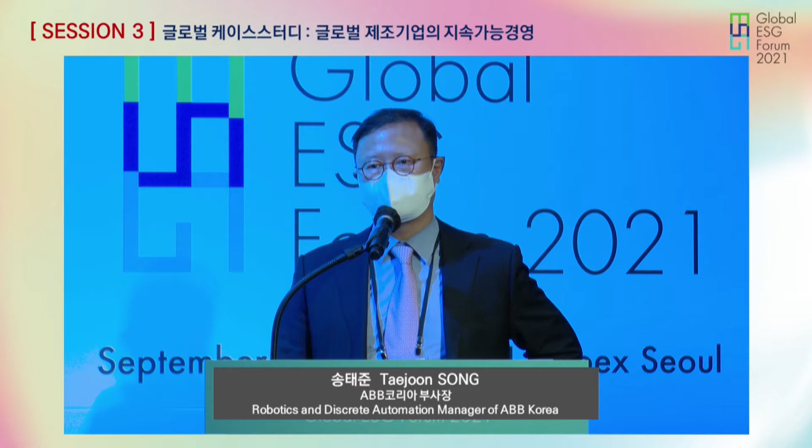ESG is the topic, I think, a philosophical domain, and I'm very happy to deal with this. Through the keynote speech, we have been hearing about the strategy and mission of ABB's strategy about ESG. I would like to go a little bit into the detail and our plan for the present and the future.

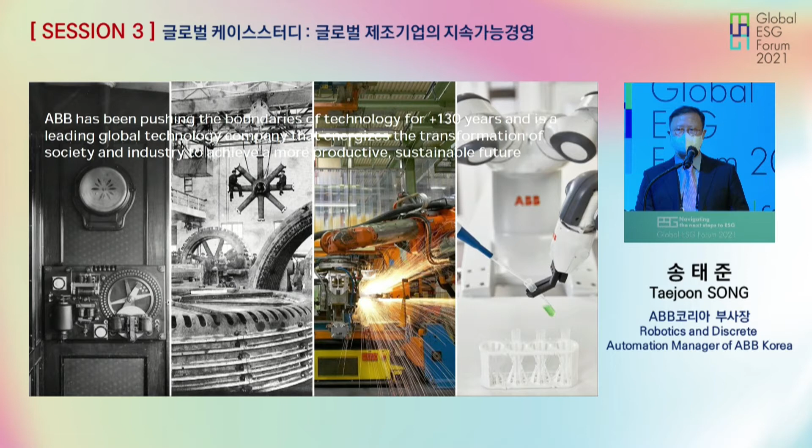You may not know much about ABB, so as an introduction: ABB is a technology provider to lead the changes in society and industry. It has 130 years of history, and ABB is helping more than 1,000 companies around the world.

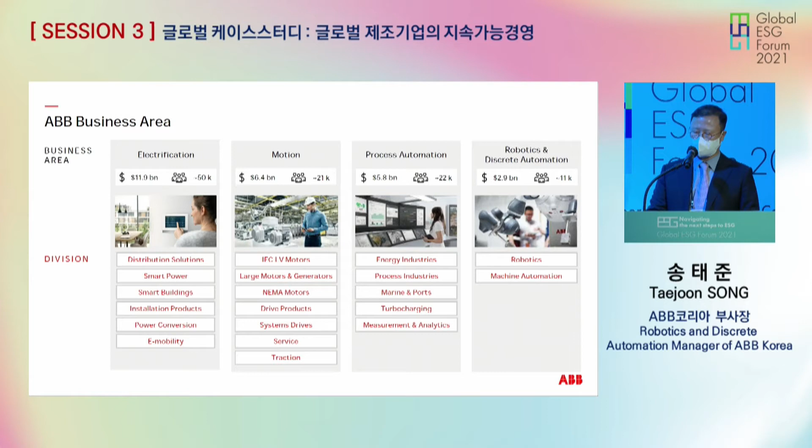As you see here, this is our business portfolio. For the direction of sustainability and ESG, I think these two businesses are important: electrification and motion. They have a very diverse portfolio, and they are the leading global trend in their domains.

As of 2020, ABB has already reduced emissions by 40%. And with the emergence of ESG and CSR, the socially responsible company initiative, I believe ESG is a more detailed or specific concept derived from CSR.

Reflecting the current trend, we have been dealing with different stakeholders, including customers, shareholders, investors, and suppliers. By interviewing them, we capture those results into our strategy. And as an extension, we set the goal for a low carbon society and try to reduce resource use.

ABB aims to make a contribution to society. That's why we came up with this concept, and for that we pursue integrity and sustainability.

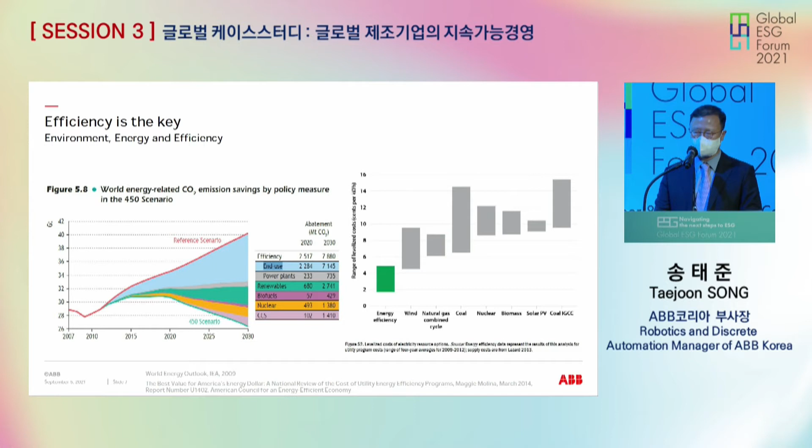ESG strategy is pursued not only internally, but also externally with our suppliers and customers. If you look at energy efficiency directly, the most efficient solution comes from high efficiency motors and drives.

As you know, 3/4 of the world's energy comes from the manufacturing sector, infrastructure sector, and transportation sector. So these three industries cover 3/4 of emissions, and electricity is used to operate motors.

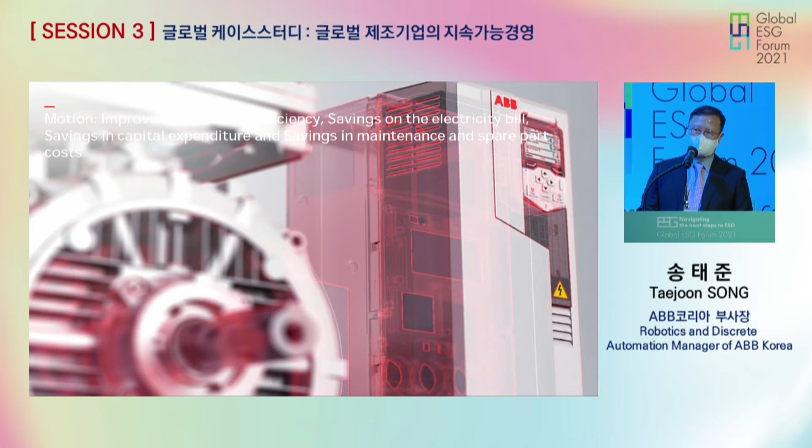70% of electricity is used for motors, and more than half of motors can be better operated by controlling the electricity input. So motor efficiency is important. However, electricity efficiency is not well applied, so half of that 70% and half of the 50% can be improved by making motors and drives more efficient. Technologies are available to make them more efficient, but there are other factors like economic factors, prices, and other reasons that affect decisions.

Today, I also want to deal with the indirect efficiency matters along with the direct efficiency. We have to always consider the impact of the indirect efficiency.

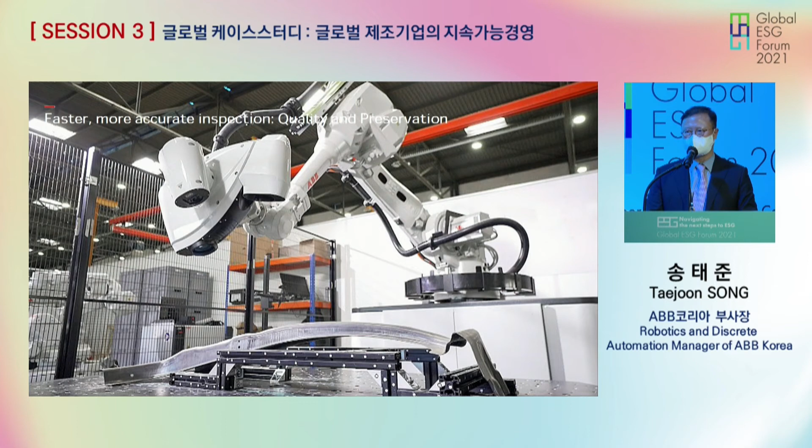The image you are looking at is a robot combined with machine learning and 3D technology. This robot is able to inspect the product's quality very accurately and exactly. When you think of automation, you think of better efficiency and human replacement. However, what's more important is consistency and safety on the manufacturing floor. Consistent quality is important because it is related to resource saving—good quality leads to saving of resources, and that should be included in your decision making.

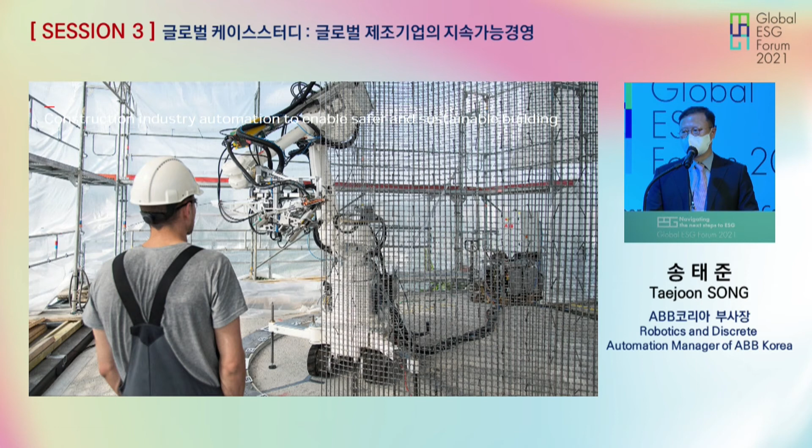In construction scenes, robots are being used for sustainable building construction and on wide construction floors. The buildings are used for a safer environment, and resource saving is also another agenda for robot use.

One important mission is recycling. We can develop eco-friendly materials to replace conventional materials. However, even though recyclable materials are available, the recycle rate is very low. If automation comes in, we can improve sorting activities, and once materials are sorted well, they can be used by 3D printers aided by robotics to produce more value-added products. That will have a better environmental impact, but also a better social impact.

It will reduce energy use and have a better footprint on nature.

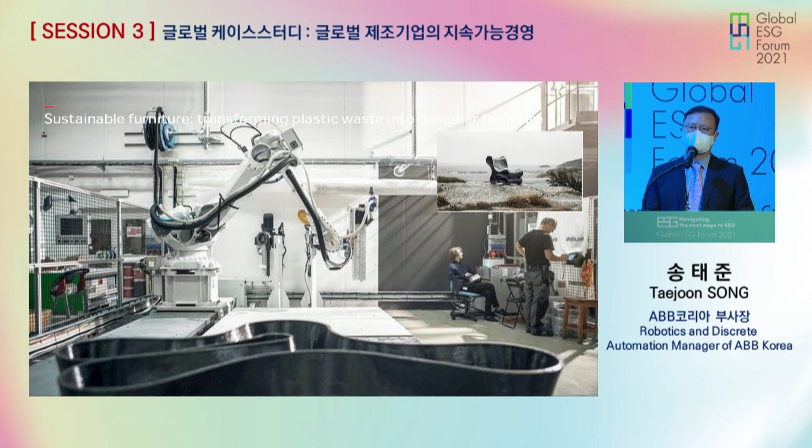ABB technologies are used by customers along with our products and solutions, and we believe that will be very effective. Not only relying on our technology, our customers are making their own efforts as well.

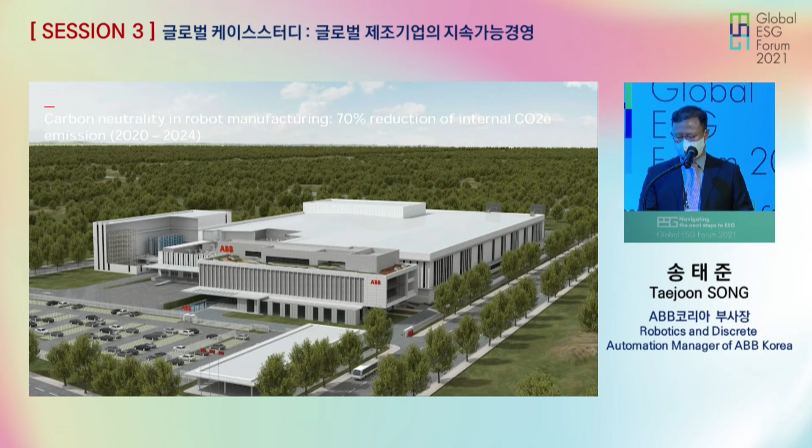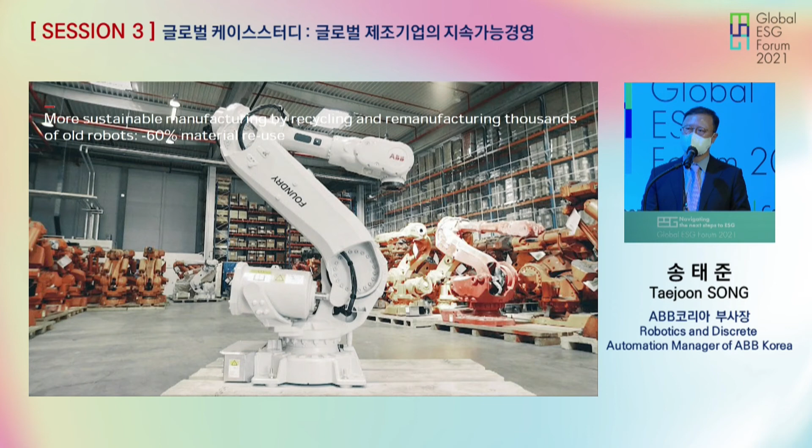That project is to recycle waste robots, so robots will be revitalized—meaning components will be reused. ABB robots are very robust, so their frame and materials can be recycled. Even though robots have been in use for more than 15 to 20 years, the software can be upgraded to revitalize the robots to meet current needs.

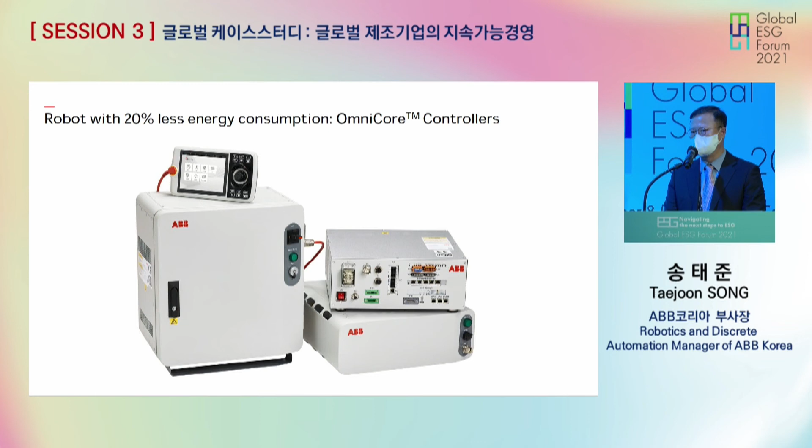We don't stop there—we created new controllers so we can save 20% of power by using this controller. This is my last slide.

In the business world, low energy, low carbon, and high efficiency initiatives are to be realized. In order to do so, what's more important is purchase or procurement. The purchase or procurement principles have to be shifted toward efficiency and better ROI, so those activities have to be retuned to the principle of ESG strategically. Then all the following initiatives will be realized on the front line.